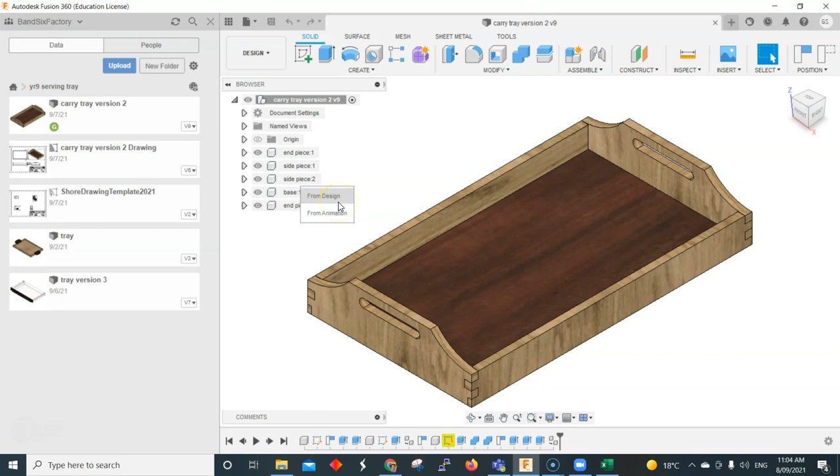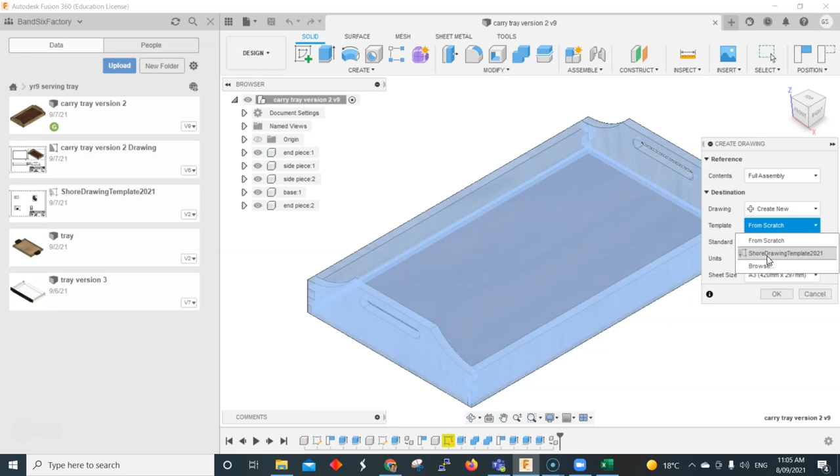We go down into drawing and draw from design, and we can actually use our template that we've already made. I'm going to create a new drawing using our drawing template, which you'll be able to download off the Lampada page - I'll provide a link in the description below. So I'll just go into the drawing template and click OK.

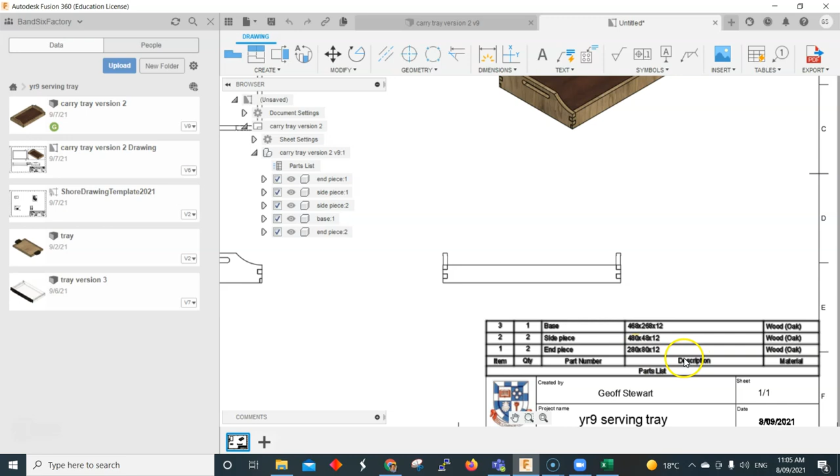This comes through into the first piece here. Now I've actually labeled these in our parts list. So we've got our item number 1, 2, 3, the quantities of each piece, and a description, which I'll show you how to do in a little bit.

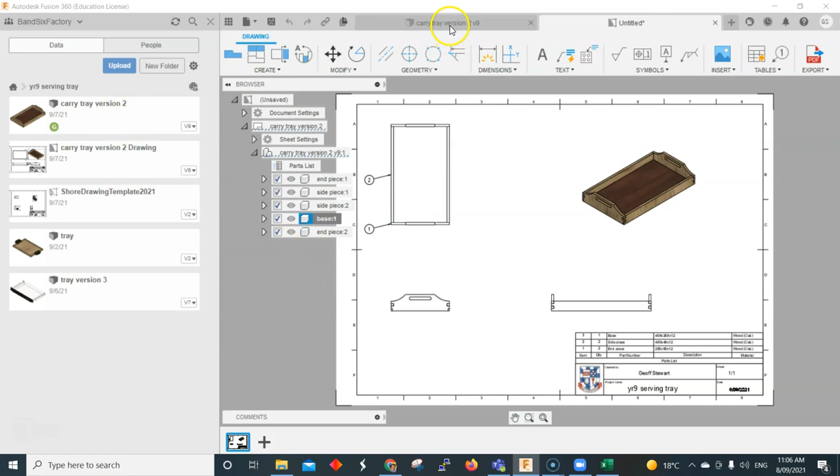So to get it to show the size, length, width and thickness of each bit of wood, we need to go back into the original design. So if we go back into our carry tray, go into the parts, and go to edit properties, it'll bring up the properties here for each part, and I've just typed in the dimensions for each one.

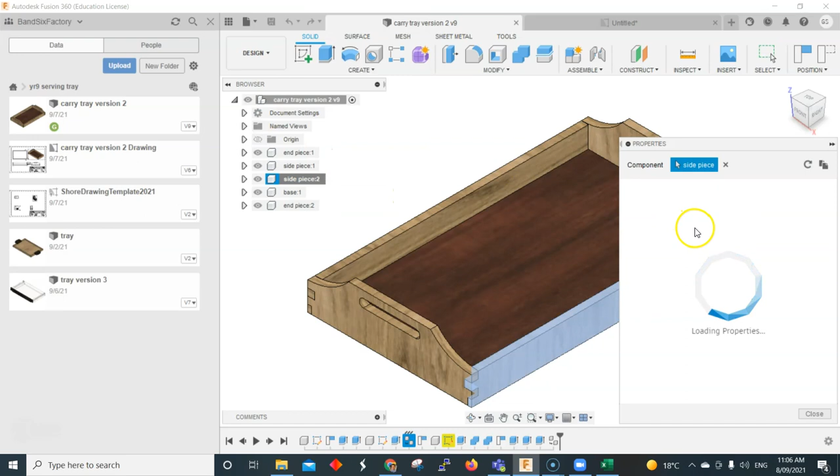You can do the same for each piece. Here's the properties for this section, and what that does when we go into the drawing is change all the information there for us and update it. So just type it in there - 480 by 48 by 12.

So when we go back across into our drawing sheet here, it will show up, and we'll bring across our name, the project name, the date, things like that.

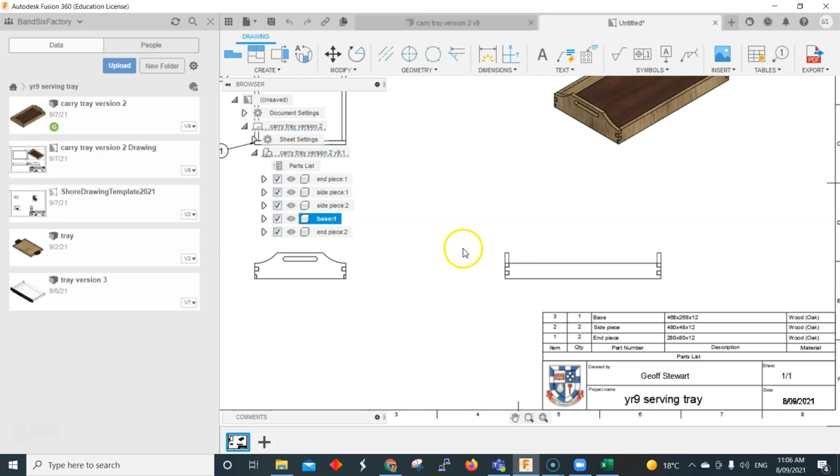Now once we've got that, in our front view I might just edit that view because I'd like to change that around. Let's just change it to the right side view, so I get more detail in our front view - that's the best way to do it.

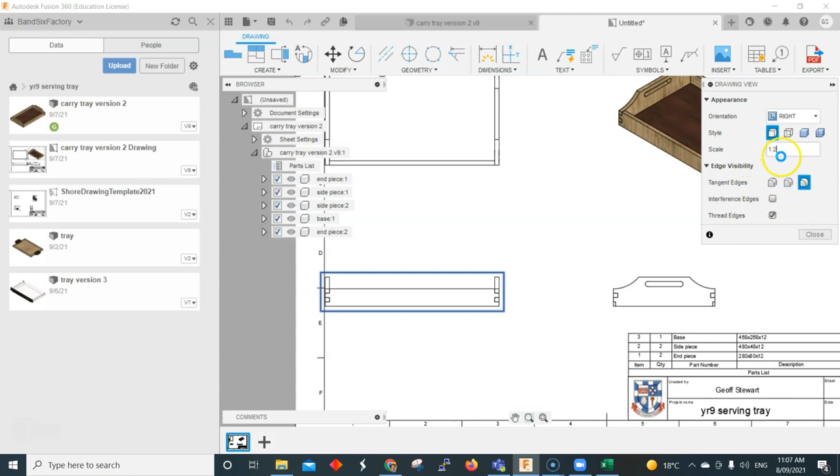I might change the scale of this. Let's change this scale down - we'll try 1:4. Let's go 1:2 actually, let's see how big that is. There you go, that's a little too big, so let's just go 1:3. Okay, 1:3 could be good to fit on. I'm just going to drag that, close that, and drag it across to position this in the right area.

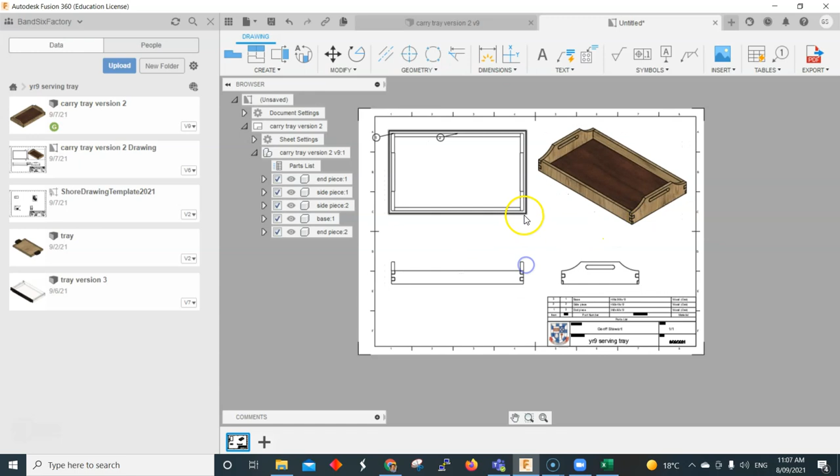Okay, now let's go in and change some of these symbols around here. So we've got our symbols - I'm just going to drag this around.

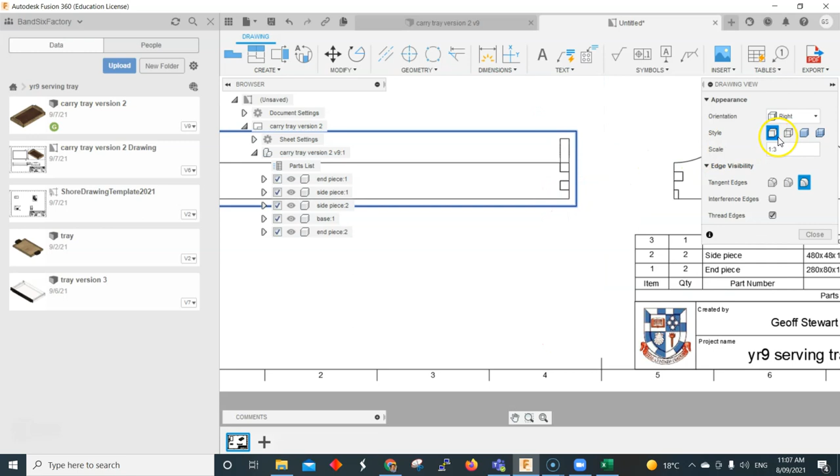We might also edit this view to show all the hidden detail in there, which is what we want. So we can now see where our rebate joint is and where our handle goes through. It's good.

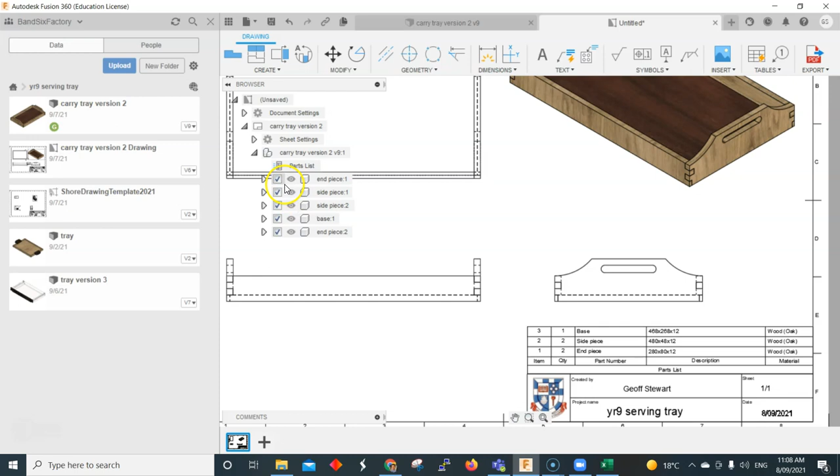Okay, I'm just going to hide our end piece here for the moment - our two end pieces - because I want to add a symbol, our bubble balloon, into this piece here, which is part 3, the base. Okay, so that shows up there.

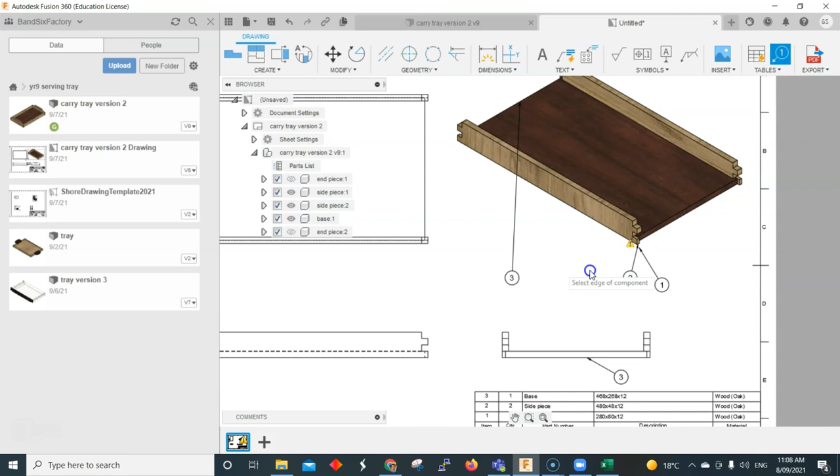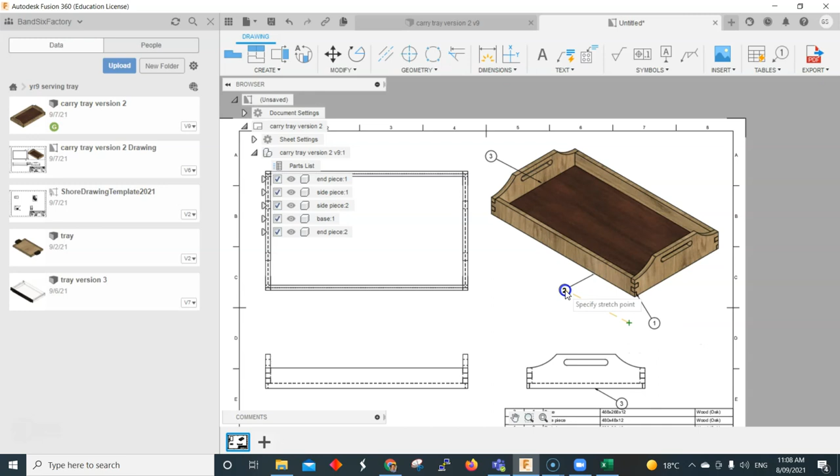Now I'm just going to turn the parts back on again and drag that around a little bit, adjust that. I might get rid of - actually delete that off there. We'll use that to put our dimensions on. Just adjust it up a little bit.

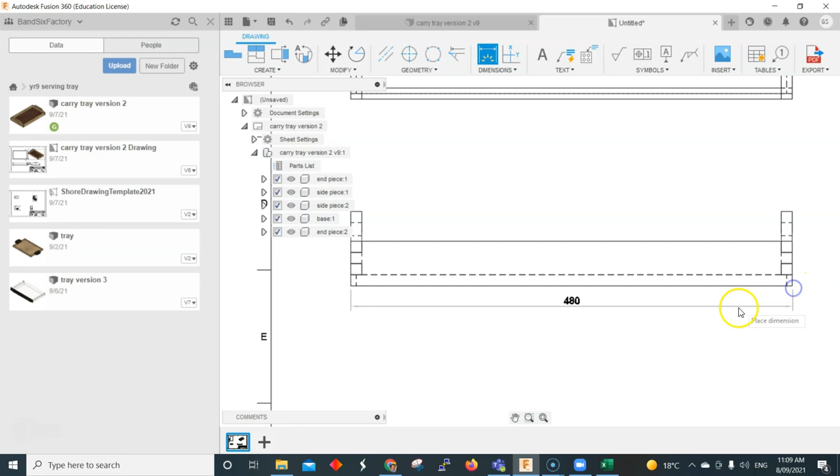Okay, so let's add some dimensions in. I'm just going to click on the dimension tool, and for our first bit we're going to just do the length. That's pretty good, and then we'll do the width on this one.

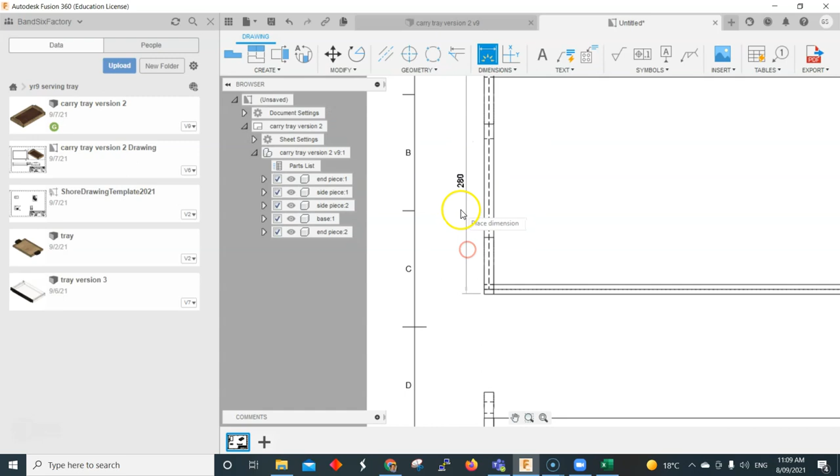So we'll use this one from that corner. Did I actually select it? No, just going to press it off that. Try it again - that corner down to this corner, 280, and you get some overall sizes there. Okay, that's good for the first part.

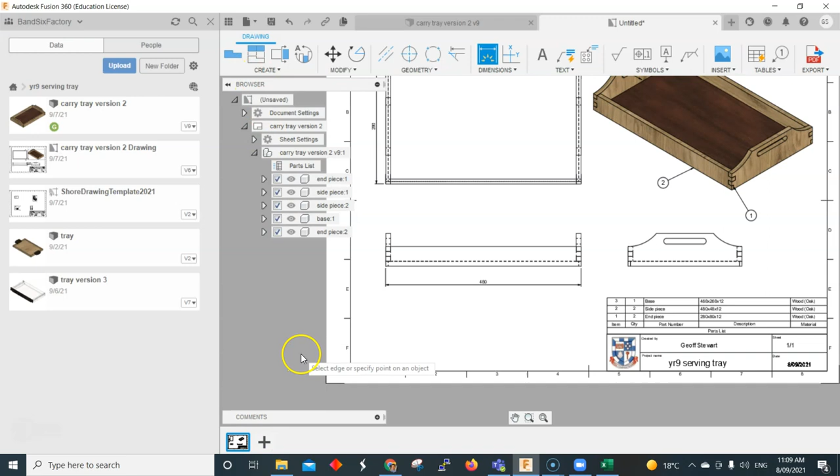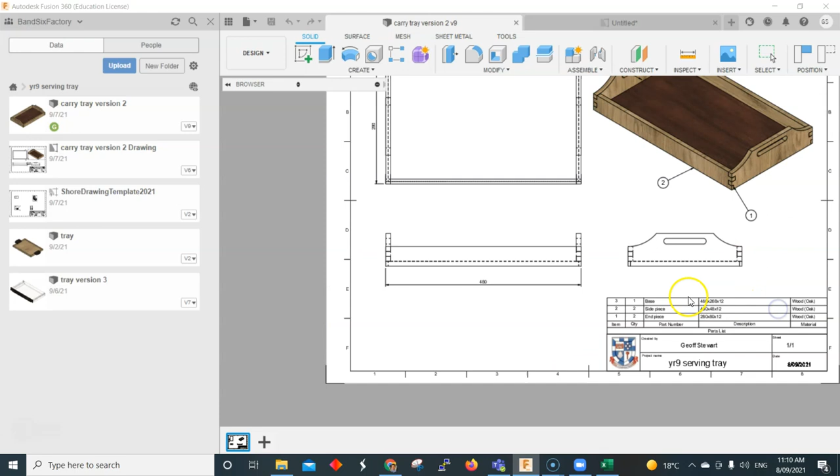Now what we might do is go up and actually add another sheet to this drawing - add a new drawing to that. So let's go back to our carry tray, and I want to edit this and create a drawing of the end piece, and add it to the one we've already made, and just click OK. So now we're adding this piece in here.

Let's just change this up to scale 1 to 2, let's say - even 1 to 1.5. It looks pretty good. I'm going to drag that and click OK.

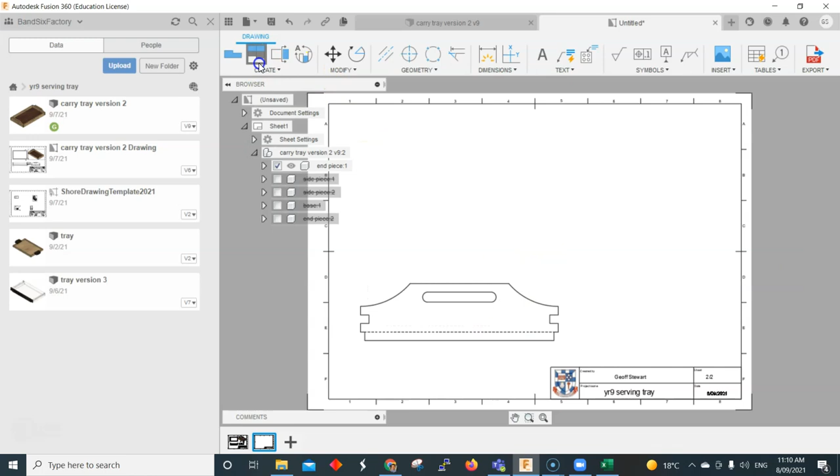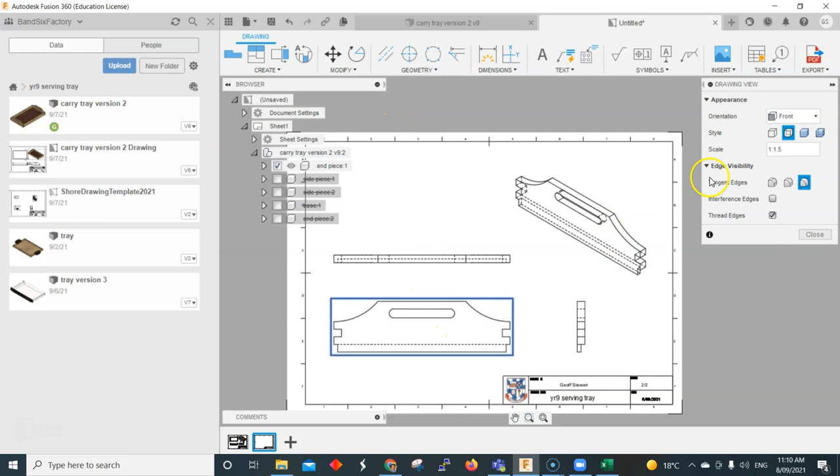Let's modify that, drag up a piece there, and a piece there, and actually we'll just do one up there. Now I'm looking at the back end of this, so let's rotate that round. I'll edit that view, and then we're looking at the front, so let's look at the back end.

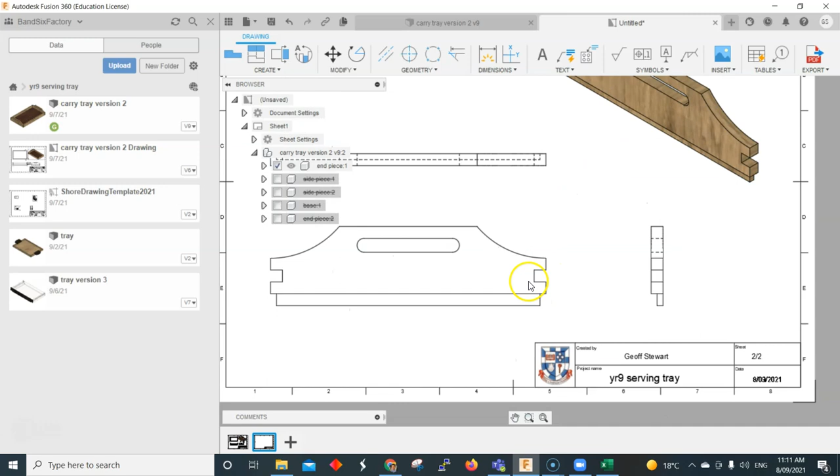Edit this view here, make that one shaded, and make it close. Now let's add some dimensions into this. We're going to add in a dimension to start off with, so let's go from that corner up into that corner there, and let's say that's 12.

Okay, actually I'm just going to escape out of that. Let's delete that, and let's just do it from that point there to that point there, so it stands off. Okay, now let's add in another type of dimension, a baseline dimension.

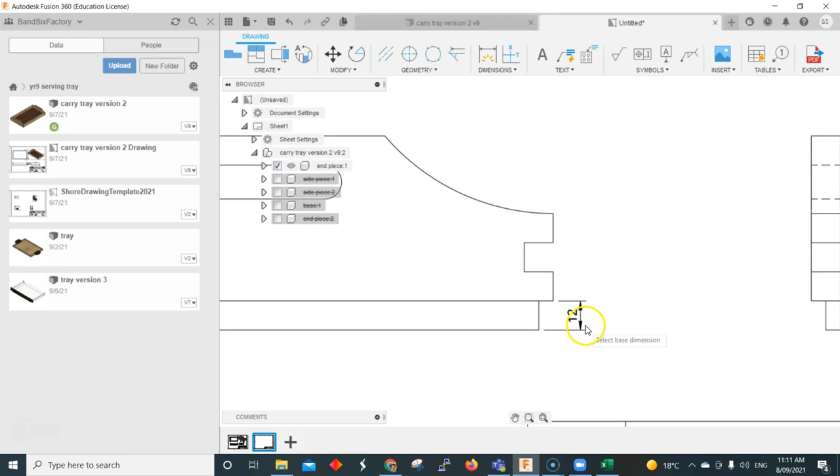So we'll select this as our baseline, and then let's click on the corners here. So we've got okay, and go okay. Let's delete that one actually, and move this in a bit closer.

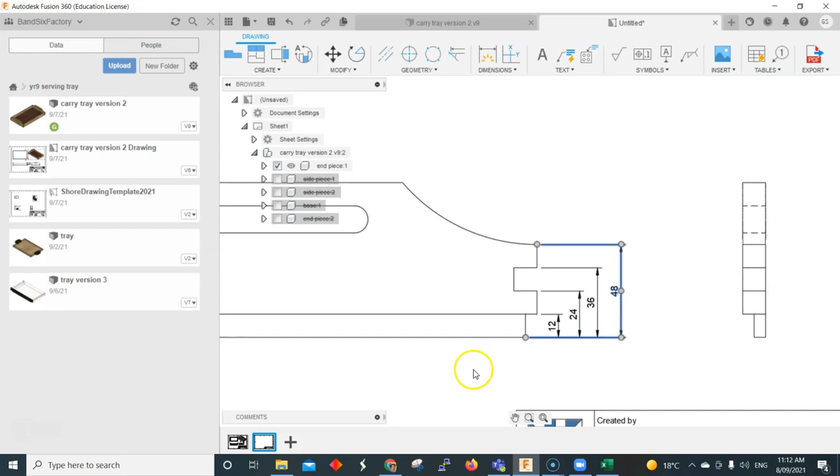Okay, we'll move this across a little bit. And I might just add in some standard dimensions here. Let's add another dimension on this side, make it easy for ourselves. So we'll do one there to one there, and that is 12 millimeters.

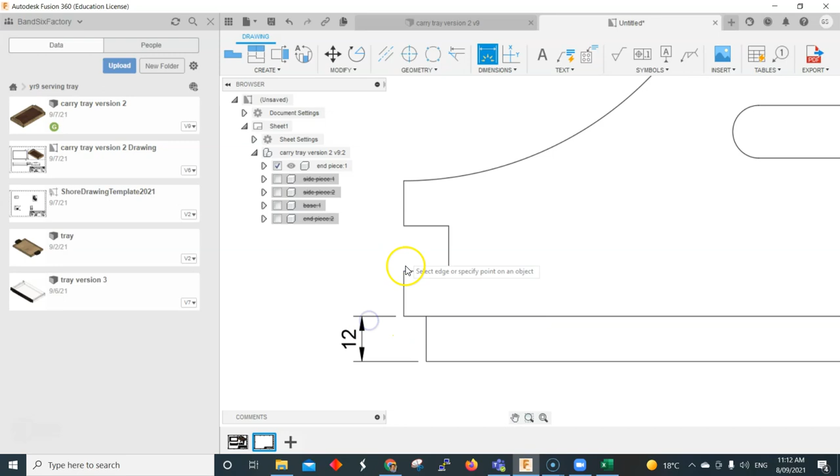And let's do a different type of dimension now. Let's do a chain dimension. So we'll pick our base dimension, and so that's now showing. Oh, I'm just going to delete that one. Let's try that one again.

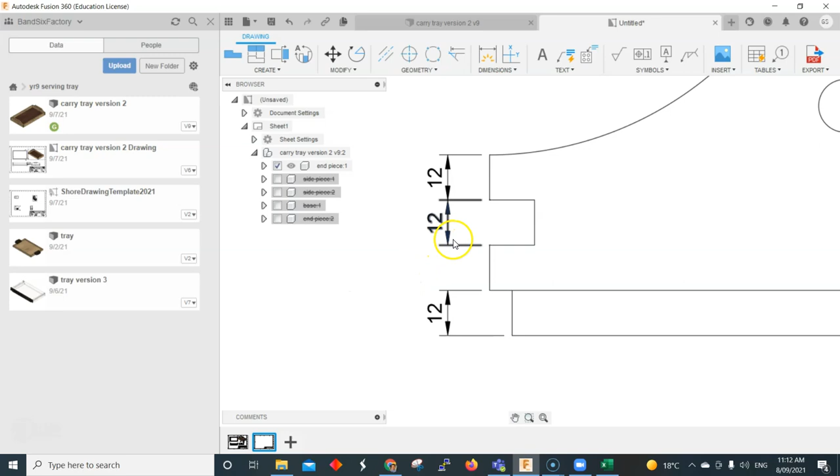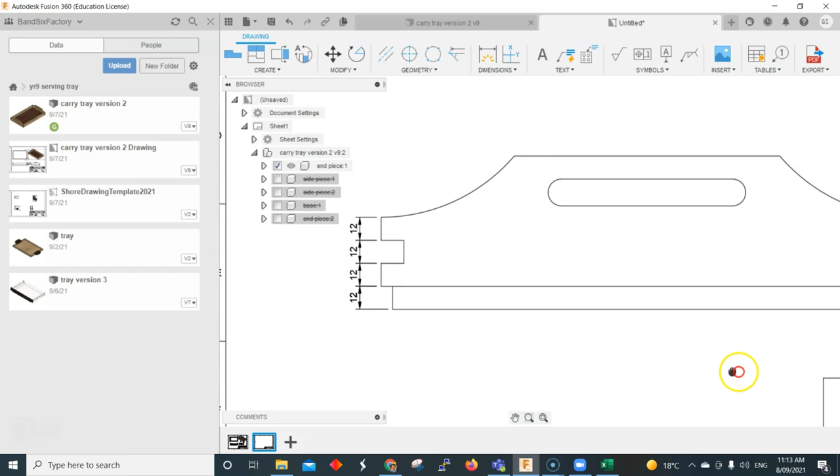Dimensions, chain dimension, select base dimension. That's like a bit of over dimensioning, but at least if you can't count, it probably helps.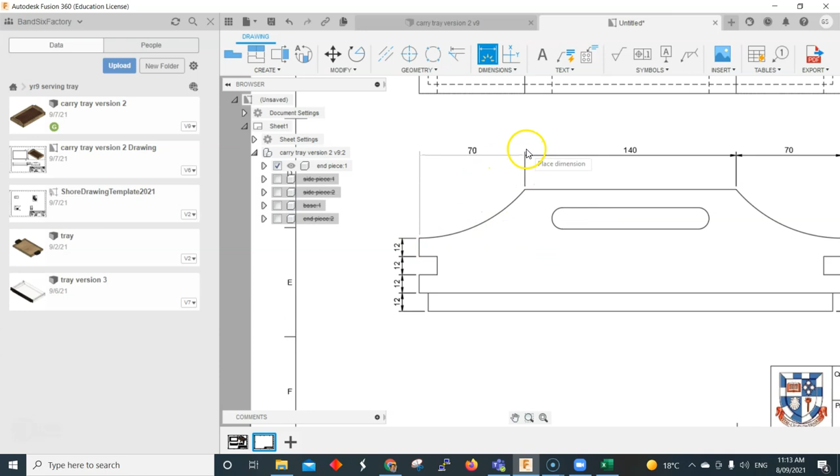Next one, let's do a dimension here, and we'll add a 140 into that, and we'll do another dimension from there to there, 70, there to there, and 70.

Okay, and we have our heights. So from there to there is 12 millimeters, there to there is 14. We have our little rebate joint here, it's 6 millimeters. Actually, that's good.

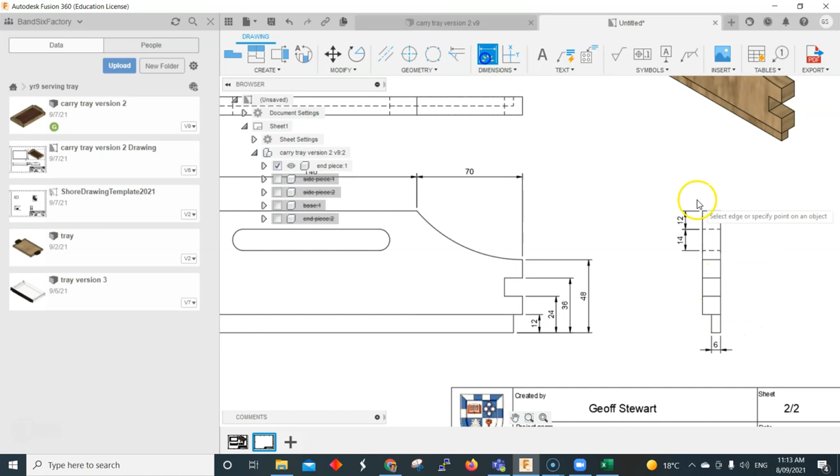We'll do another dimension at the top here from there to there. 12 millimeters.

What other dimensions can we put in here? Let's put in the length of that there, which we can actually put in from there to there. That's the total length. Actually, want to do from... it's really 90, isn't it? Suppose that's okay. It's hard to pick up the dimension off the end of that.

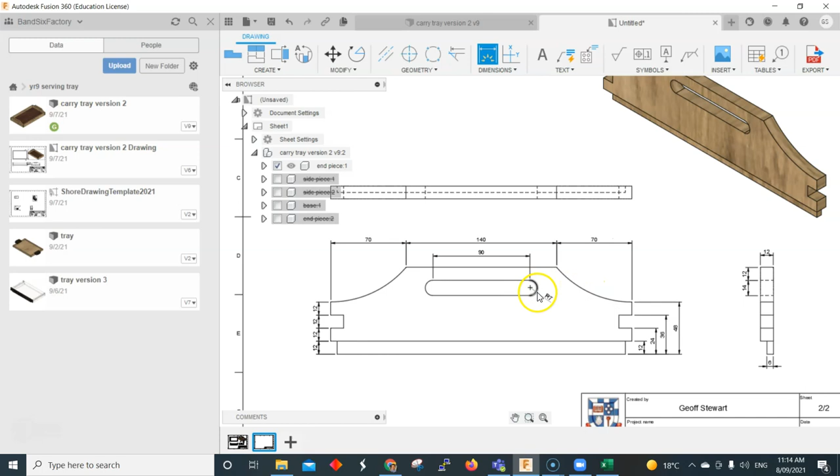Okay, so we've got the heights there. We know the position of each one. Maybe do a radius there. I think that's pretty good. We've got to actually do another dimension for that.

It's from that corner to that corner there. Okay, and then we have it's good. Okay, I'm happy with that. All right, so let's go to the next one,

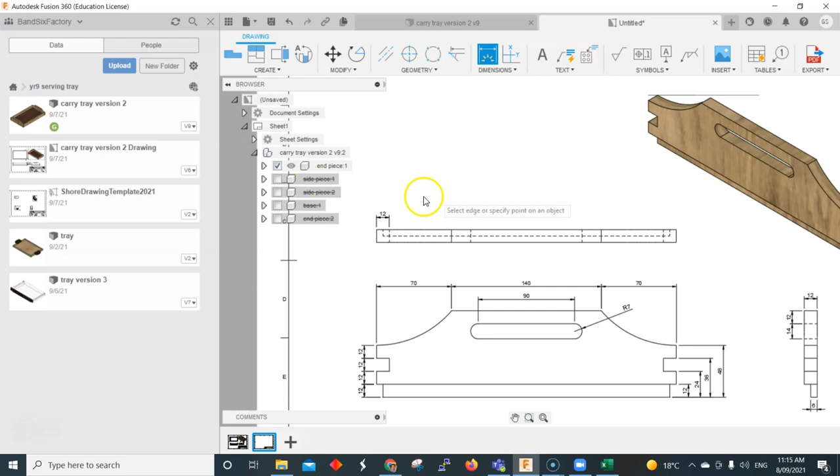and we will create another sketch, another. So we have our two drawings here. We have to just do our side piece. So let's go back to the carry tray, and we're going to do a sketch from this side piece. Right click on it, and we'll create a drawing using that Shore template, and we're going to add it into our untitled one and just click OK.

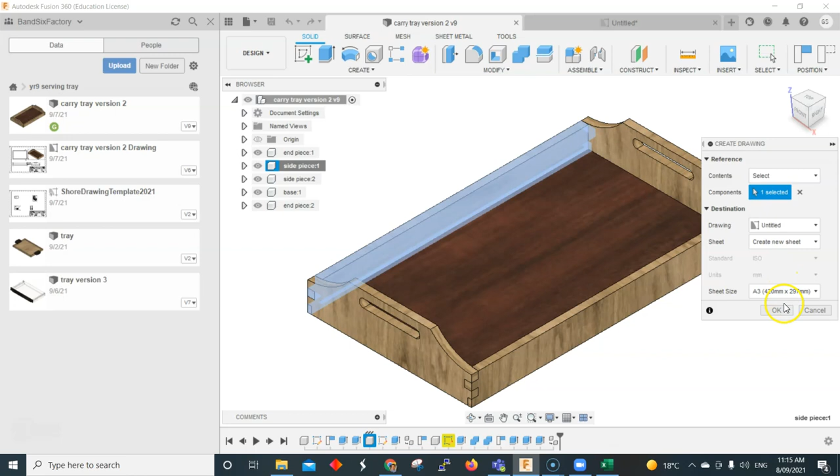And that'll bring up our view. So I'm going to rotate this. We want to do the side view, the right side view. Place it in there. Let's just change the scale of this up again to 1.3, let's say

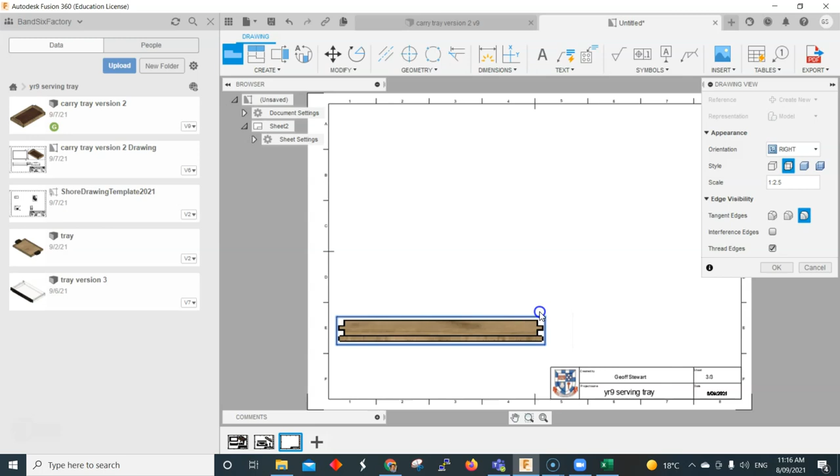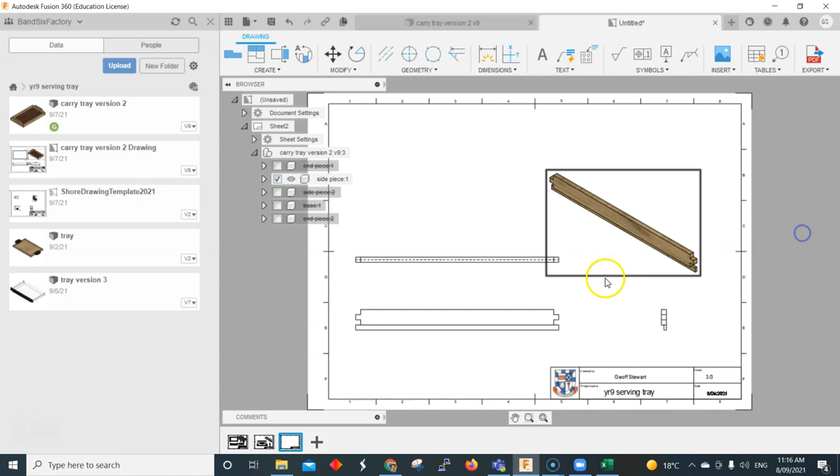1:2.5. It's a fairly good scale. Go OK. Let's place it up there. And we'll edit this. Shaded. Close. And let's do the same dimensions.

So we've got our dimensioning tool here. So we'll click on dimension to our length. We'll do a dimension here. So let's just do the 12 from there to there. And let's add in a chain dimension, so we're starting from this point.

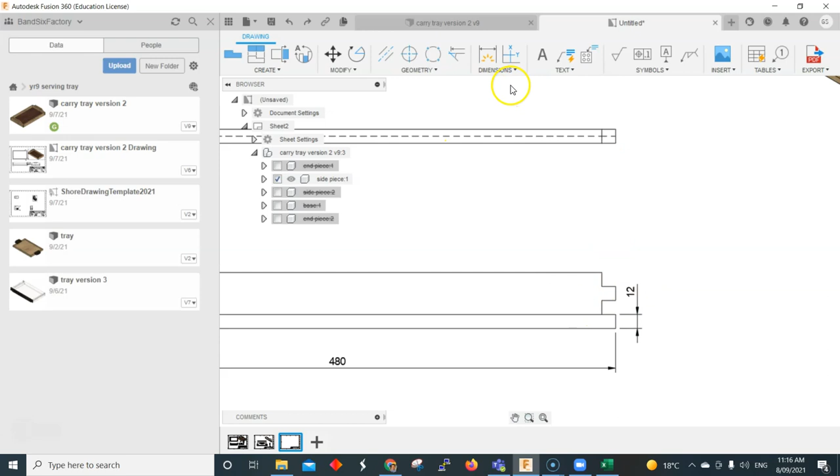Actually, what I might do, let's undo that. We have 12 there. Let's add in, I might change the scale of this up a little bit so we can actually fit it in correctly, all the dimensions.

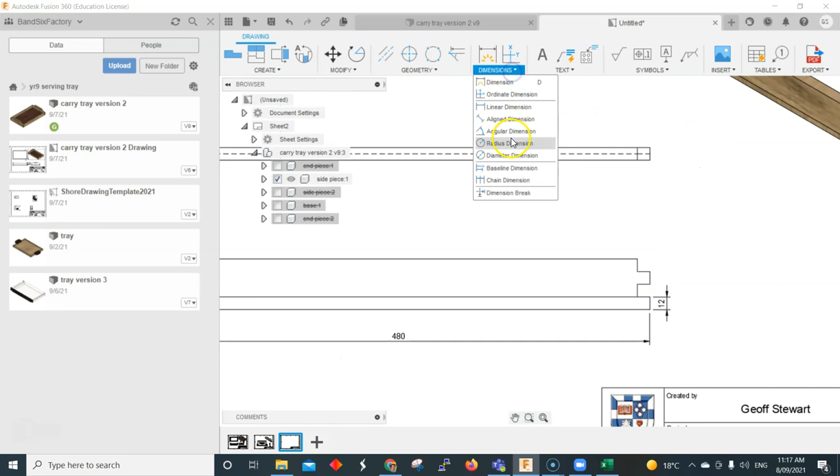Okay, let's try that and see if that works a little bit better. Dimensions, chain dimension. That works pretty well. And dimension from here to here, 12.

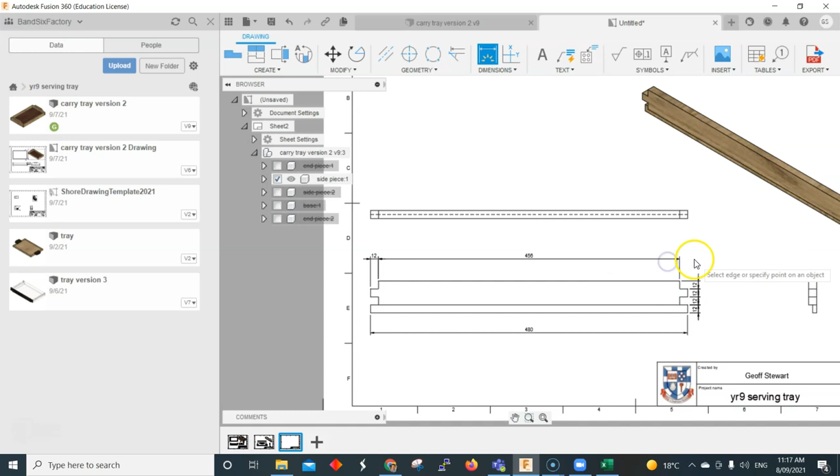Okay, that looks pretty good. And then we'll just do another dimension across here. Okay, that looks pretty good.

Okay, and then our last piece we have to do is our base. So let's just go back to the carry tray again, and we're going to select the base, and we'll just do this exactly the same thing. Properties. Oh, sorry. Yep, we can actually add in the properties.

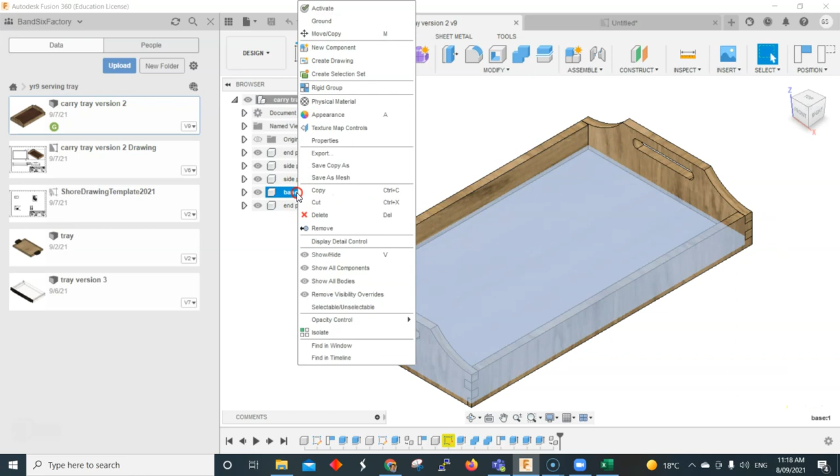So we've added the dimensions for that base. Let's do a create a drawing. We're going to use the untitled as our drawing. Create a new sheet and click OK.

And we'll place in our base view, which is that view. And I might want to do the right side view again. Change the scale up a little bit. Let's do 1 to say 3. Okay, now let's

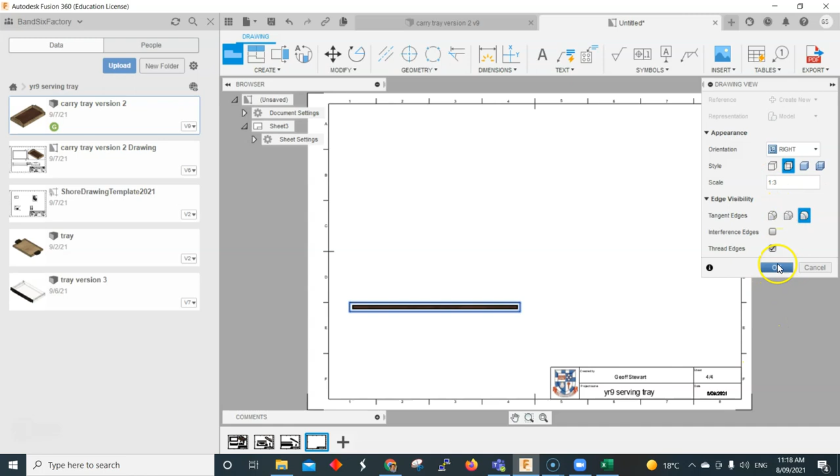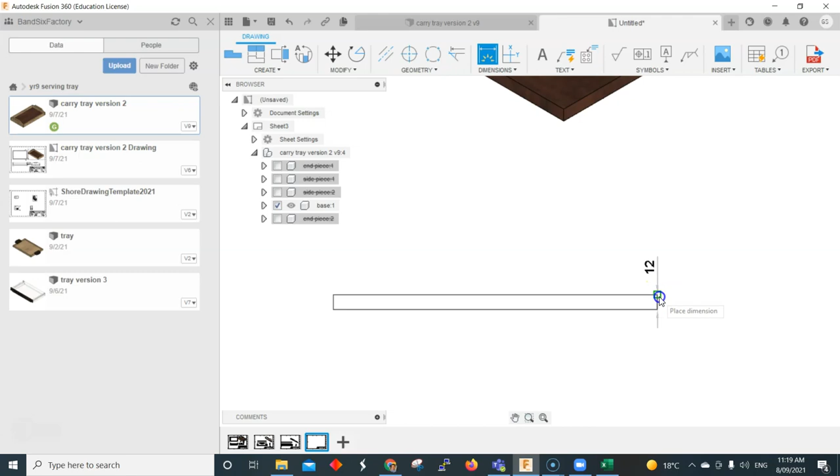create some parts out of that. If you select that and change that to there, close, add a dimension so we know straight away that 12 to there. We have our width and we have our length.

Okay, now once we've got that, what we want to do, we want to export that. So we're going to export it as a PDF. Well, actually, first of all, let's just save it as. I'm going to save as our drawing. So we're going to say, just rename this.

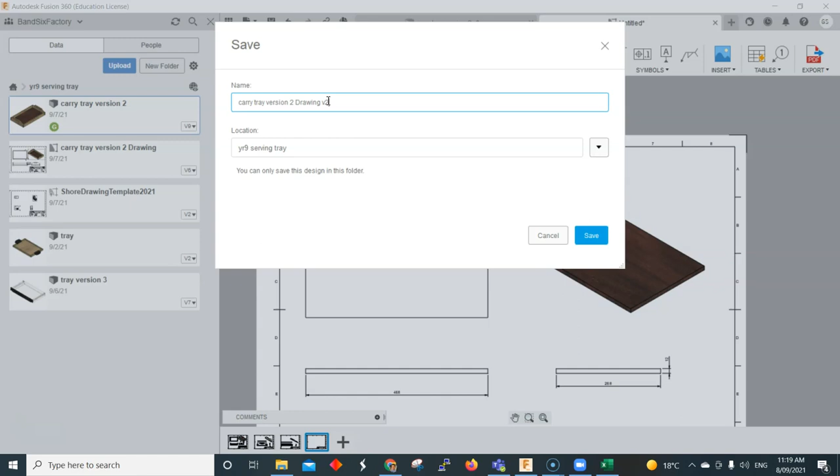I'm going to call mine version 2. Save that. So it's going to save it over on the left-hand side here. And once that's saved, we can then export it as a PDF and send that to where we need to go, or print it out, take it into the woodwork room.

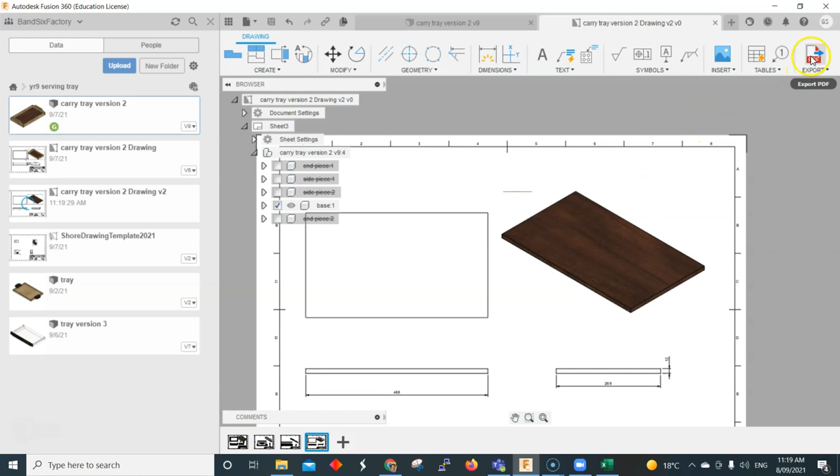Okay, I'll just show you that example. So let's export this, export PDF. Okay, and once we open up that PDF, we now have our set of drawings ready to go, and it should have your name, the date, everything written there.